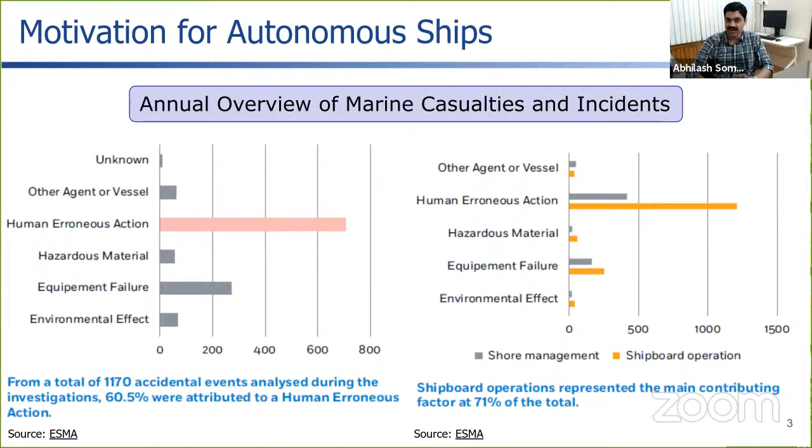But one can argue whether actually all these erroneous actions are happening on board a vessel. That's where we come to the graph on the right, where you see that shipboard operations contribute more than shore-based operations. So operations performed on the ship generally lead to more marine casualties or incidents as compared to the number of incidents occurring on the shore and resulting in an incident.

So the idea behind autonomous ship development is to eliminate the crew from the ship and hopefully see a reduced human risk or human error. If we reduce the human element, take it out, then hopefully we will have a reduction in the number of incidents or accidents which we generally see in the maritime sector. So the primary idea is to automate all the mundane operations which the crew performs regularly on board a vessel. But at the same time, we do want to maintain remote operation of the vehicle for critical situations, where situations warrant that immediate action be taken over, so the human element should still be in the loop when dealing with these autonomous vessels.

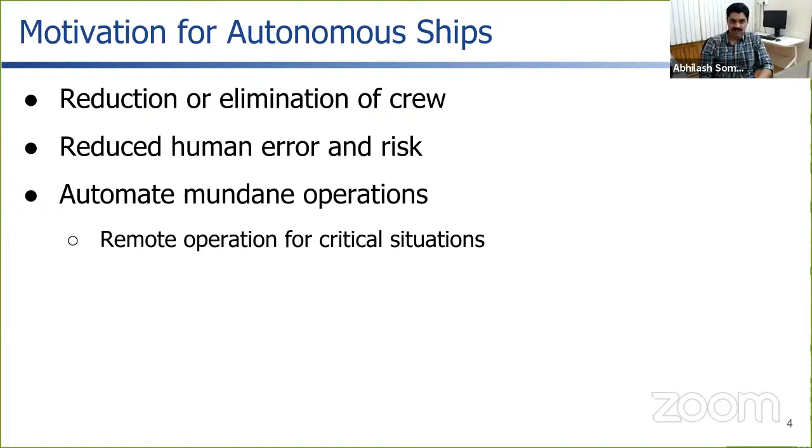On a traditional ship, you require the bridge because the crew manning the ship are housed in the bridge and are able to control the ship from there. Also, a line of sight needs to be maintained, so you should not have obstructions from the bridge to the outer sea. Similarly, you want the crew to be able to sense their environment around them, so the structure of the hull is built in such a manner that this can be achieved.

But if we remove the crew altogether from the ship, we can go for more creative designs. First, we need not have the accommodation deck, and that space—you don't have to have galleys, you don't have to have accommodation—all of that space can now be reallocated to carry more cargo. Similarly, since there is no crew, you don't have to pay any crew salaries.

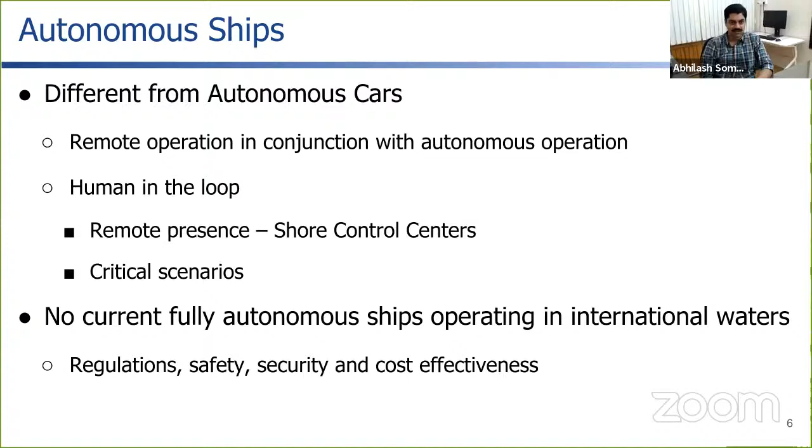We do not have the regulations in place. We don't have a safety assessment criteria which is fully set up, and we are still concerned with security and cost effectiveness. These are some of the factors which are the reason why we are not seeing fully autonomous vessels in operation today. So let's talk a little about each of these to get the context.

Just like cars have to follow certain rules on the road, ships have to follow certain rules when operating in navigational channels. These rules are known as COLREGs, or Collision Regulations, set up way back in the 1970s, and they require some modification to accommodate the newer breed of autonomous vessels. We still are not at a level where these collision regulations take into account simultaneous operation between manned and unmanned vessels.

Also, safety is a major criterion. When signing off on a ship design, a classification society has to have certain concrete metrics. If we don't have a particular set metric which determines how safe an autonomous vessel is, it is difficult for classification societies to sign off on them and bring them into operation. So we need standard metrics of safety to be incorporated or developed before autonomous vessels can see international waters.

Similarly, when accidents happen, who is liable when an autonomous ship is involved? These are questions which are still unanswered as of now. Similarly, when vessels cross into different state lines, who gets to control the operation in the event of a critical scenario? Is it the flag state in whose jurisdiction the ship is, or is it the owner who has to take control of the vessel? So some guidelines have to be fixed up before we can bring these vessels to reality.

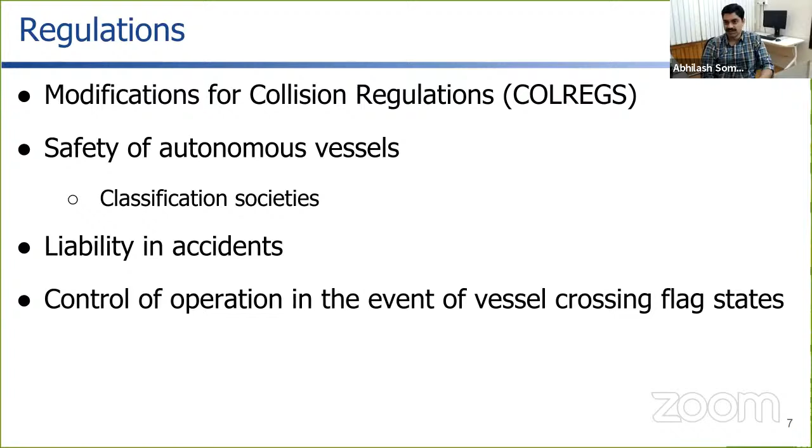Security and cost effectiveness. So let's talk about the idea that when we take away the crew, we need different amounts of sensors to sense the environment around the ship so that it can perceive its environment and make autonomous decisions. Also, since a human in the loop is important, we need reliable communication of this collected information back to shore control. So you need high-speed data transfers without connection breaks, or where you can reduce these breaks. Similarly, cybersecurity is a threat that has to be dealt with effectively, especially with respect to spoofing or hacking.

Finally, cost effectiveness is the bottom line for the maritime industry. The technology cost required to make a vessel autonomous must be offset by the revenues earned by taking the crew out of the equation. As long as this happens, we can see autonomous vessels come into existence. So as you can see, it's not so much the technology, but other constraints, especially metrics to determine whether a vessel is safe or not, that explain why we don't have autonomous vessels in operation today.

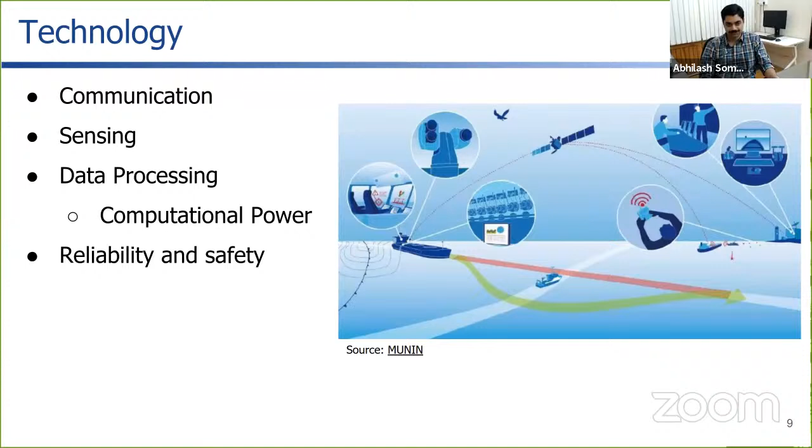As you can see, there are multiple disciplines required that come into this gamut of autonomous ships. We have hydrodynamics, where we understand the dynamics of the vessel. We have control systems which determine how we can control the vessel effectively. Then we have newer methodologies for path planning or control using artificial intelligence, robotics, and software or algorithms for the development of autonomy. No one group can typically claim expertise over all five or six areas as needed. So the best way forward is through collaborations.

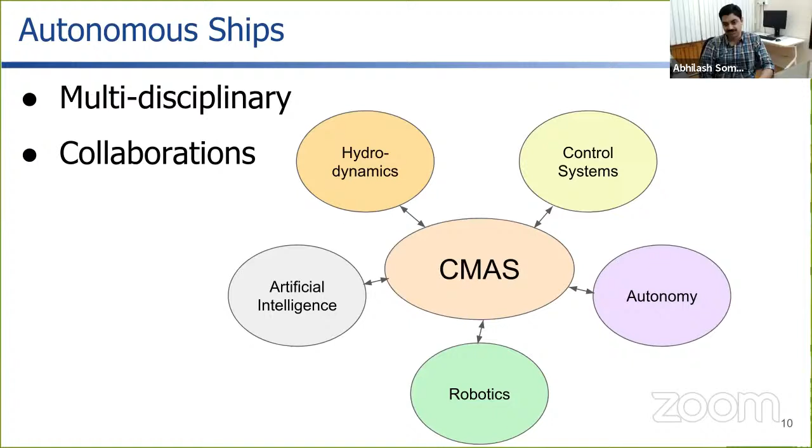And this is where our collaborative team comes into the picture. Our team is composed of 3 professors from IIT Madras. We have the co-PIs, Dr. Suresh Rajendran and Dr. R. Vijay Kumar. And we have a set of experts from other universities who will help us fill in the gaps to achieve this collaborative approach. So we have Dr. Shrikant Saripalli from Texas A&M University, Dr. Sanjay Sharma from University of Plymouth, Dr. Prasad Pereira from UIT Norway, Dr. Antonio Pascoal from IST Portugal, and Dr. Mike Benjamin from MIT. With this collaborative group, we hope to solve some of the challenges associated with determining safety for autonomous vessels and how we can cooperatively control these vessels, how they can work together to make the system much more robust and safe.

If we look at the goals of the center within the first phase, we have a goal of building multiple vessels, especially scaled vessels. Since we are interested in scaling this up to real life where we have big ships, we need to be able to perform model experiments on similar shapes. Unfortunately, many of the autonomous platforms available commercially off the shelf today do not cater to this need. They are not exact hull forms of real ships, but rather a different form, whether it be a planing craft or a completely flat-bottomed catamaran surface. So with that objective, one of the goals of the center is to build a fleet of vehicles which are scaled models of ships that can act as a test bed to investigate these problems.

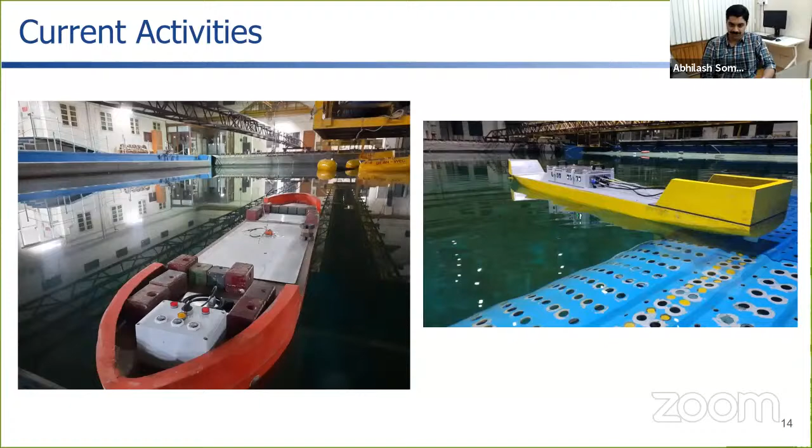After the hull is made, we have to make sure the propulsion system is in place, the motors are chosen appropriately, the shafting arrangement is done properly, and electronics are handled correctly before we can see the final vehicle in action. Once everything is ready, we are able to see the vehicle in action.

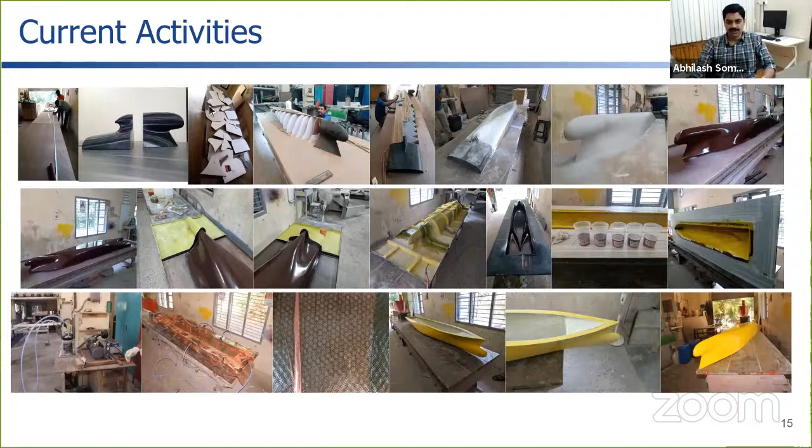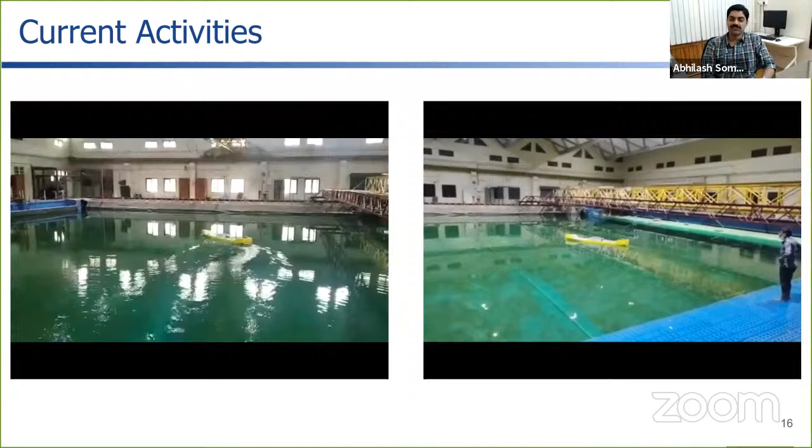Here we have a couple of videos demonstrating the test of that container ship, a scaled container ship, which we have built in our wave basin. The test you are seeing here is called a turning circle test, where we apply a certain rudder angle and hold it fixed, to allow the ship to turn at a constant rate in a calm water scenario.

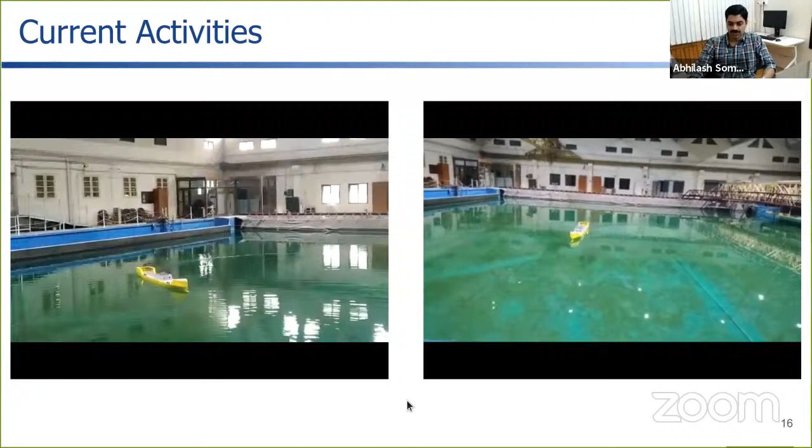Not only are we interested in building a fleet of vehicles, we are also interested in building the software stack. For example, we need to make sure the guidance, control, and navigation stacks for these vehicles are appropriately built, and we do a lot of simulation studies in these areas. We typically perform simulated studies to make sure our algorithms are doing what they are supposed to do, and then we deploy them onto our actual vehicles, which is what our next steps would be.